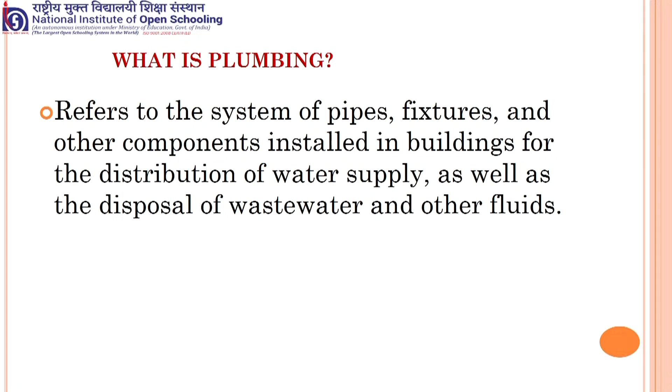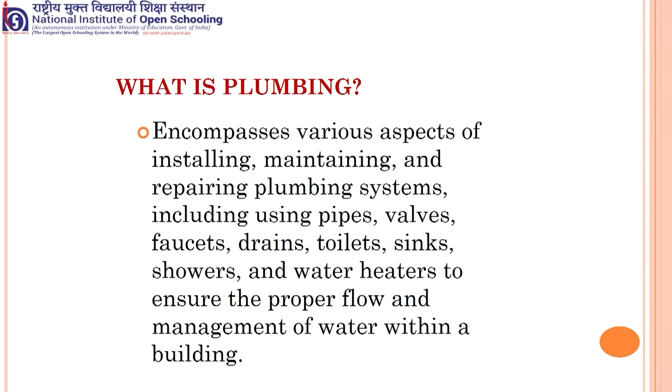Now, if I say one definition is regarding what constitutes plumbing, what are the different components of plumbing, but in another definition we have various activities. For example, installing fixtures, installing different gadgets just like a geyser or many other items, then maintaining and repairing plumbing systems, various fixtures, because every day you have wear and tear, so you need to repair that plumbing system, including pipes, valves, faucets, drains, toilets, sinks, shower, water heater or geyser, to ensure the proper flow and management of water within the building.

Now, as I told in the beginning, there is an overlapping. Sometimes we use fittings, sometimes we need fixtures. Since you are a student of NIOS and after passing there should not be any confusion in your mind, when anybody asks you to differentiate between fitting and fixture, as a proud student of NIOS, you should be able to differentiate between fitting and fixture.

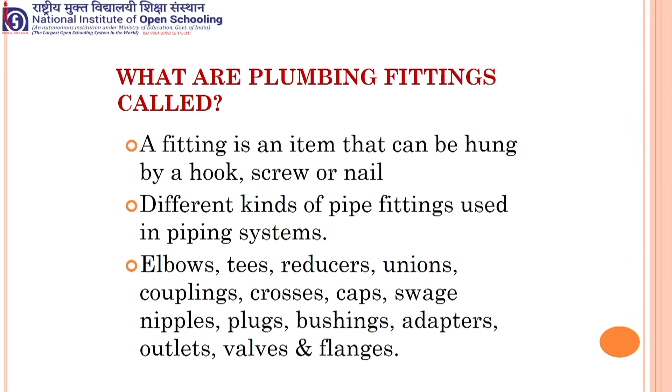Normally, a fitting is an item that can be hung by a hook, a screw or a nail. Different types of pipe fittings in a piping system are included as pipe fittings. Then different elbows, because you need elbows to bend or make an angle of water distribution. Then T's, reducer, union, couplings, crosses, caps, swage nipples, plugs, bushing, adapter, outlets, valves and flanges.

All these we have already covered in our earlier sessions, where elbows are for making an angle of 90 degrees, T's for distribution in different directions, reducer where the area gets reduced, union when you join two pipes of different cross-section area. Similarly coupling is also a type of joint, and crosses. So these are the different types of fittings.

Now comes the fixture. A fixture is a part that is connected to the plumbing system and carries water through a building. If you recall the definition of plumbing fitting, it also carries water, but basically it is used for changing the direction or joining the pipes - all that, even the piping system, comes under fitting.

While the items used for various purposes, just like for taking a bath we need a bathtub, for washing hands or washing tubs, washing utensils, you need sinks. Even showers, tubs, toilets, faucets for regulating the water flow - all these come under plumbing fixtures. The most important part which differentiates fixture and fitting: a fixture can be fixed into a wall or the floor, while a fitting is an item that can be hung by a hook, a screw or a nail. That is the basic difference between fitting and fixture.

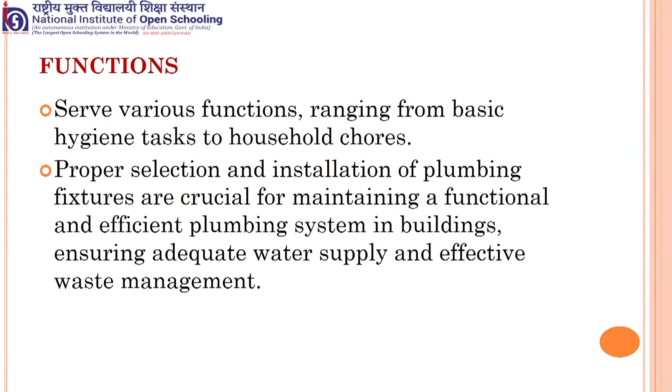If the plumber is skilled and competent, after fixing or installing the fixture, you will not face any problem. If the plumber is not competent or not skilled, then a lot of problems you will face. Even after installation, there may be chances of leakage of water, or the fixture may not work.

As in earlier slides, we include sinks, toilets, and they are properly designed because the purpose is transporting the water as well as serving the comfort of the customer or client, and it should also be hygienic. These are the several types of fixtures: urinals, faucets, showers, bathtub, toilet, and sinks.

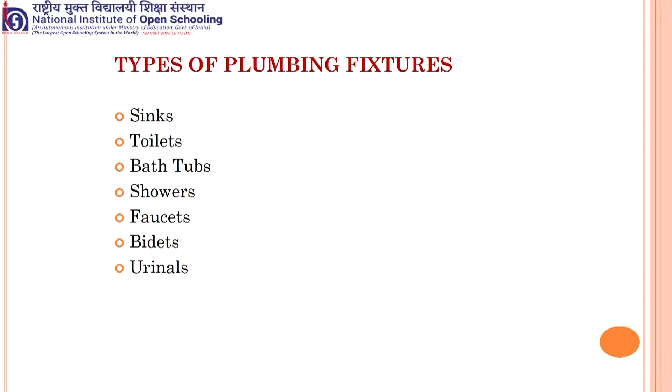Now as per your study material, the fixtures can be divided into two categories. One is called ablution fixture and another one is your soil fixture.

Ablution fixtures are required to collect the wastewater, just like your wash basin or sink, whether you want to wash your hands, utensils or vegetables. You need a certain portion where the water comes and you wash your hands, utensil or vegetable, and it goes for disposal. Similarly, in a bathtub, you collect the water, take the bath, and it goes to disposal.

Flushing cistern is for your toilets, and even the drinking fountain. These are the most common ablution fixtures.

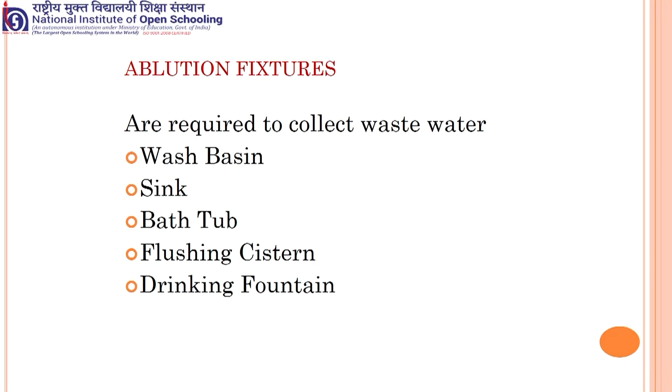Soil fixtures or soil fittings are required to take care of sewage discharge, like human waste or urine. They are from the WC and the urinals. WC means water closet. The slope sink is basically a type of pipe at a slope which connects the wash basin or sink to the main pipe.

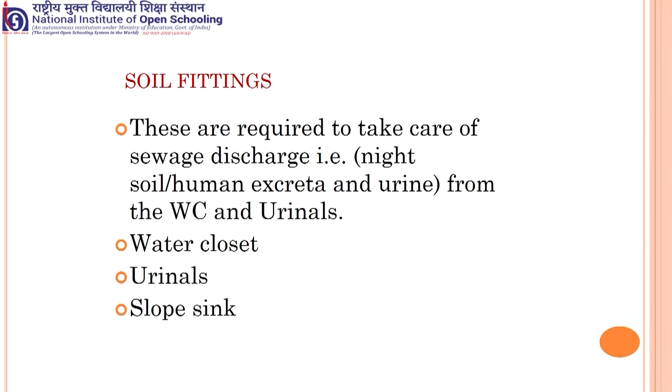Now there are certain sanitary fixtures we will take one by one, and the main purpose of today's lecture is to make you aware of the different objectives of studying fixtures. As I told you, there is sometimes an overlap where I use 'fitting' and sometimes 'fixture', but you should not be confused between the two terms.

First, the fixture or fitting should be made of durable, non-porous material with a smooth surface. There should not be a rough surface. Most importantly, the surface should be easily cleanable, so that whenever you need to clean it, you can do so comfortably.

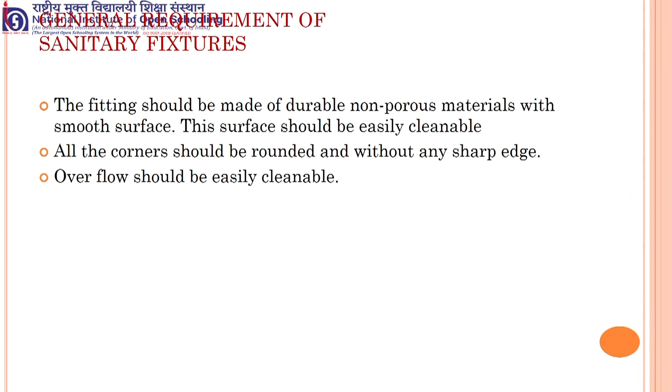All the corners should be rounded off. There should not be any sharp corner or sharp edge, because it is harmful to the plumber as well as to the domestic person. If there is a chance of overflow, it should be easily cleanable.

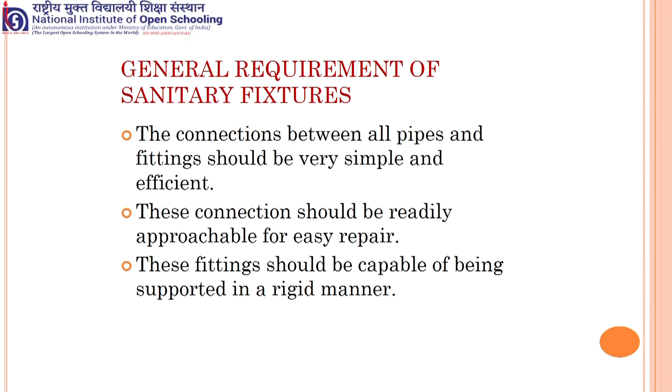Now, what are the general requirements? The connections between the pipes and the fixtures or fittings should be very simple and efficient. It should be leak proof - there should not be any leakage. It should be durable, and these connections should be easily or readily approachable.

Suppose you are connecting a wash basin to the pipe and due to wear and tear you need repair - the connection should be readily approachable, meaning it can be reached conveniently so your hand and tools can reach it.

These fittings should be capable of being supported in a rigid manner. That means whatever you are installing should not fall down - it should stay as it is with the fixtures.

Now there is an important term regarding how you will place a sanitary fixture. The most important thing is that wherever you are placing it in the apartment, it should be provided with natural light and air. The trap or grating, in Hindi called jali, can be easily checked and cleaned - the waste can be easily collected and the jali can be removed and cleaned from time to time.

The minimum distance of fittings from the wall should be 200 to 250 mm. This I have taken from your self-learning material on plumbing and piping.

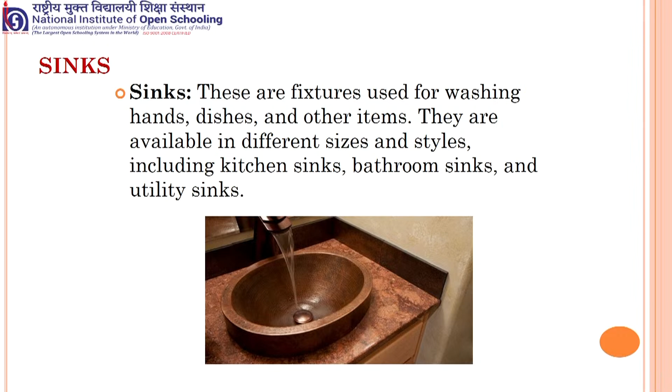Now I am giving you some pictures of the fixtures which you will come across. The first fixture is your sink. They are basically used for washing your hands, dishes and other items. Nowadays you will find they come in different sizes, styles and colors. Earlier you would find only white color, but now several beautiful colors are coming which match with the wall color or furniture color. They are used in the kitchen, bathroom and as utility sinks.

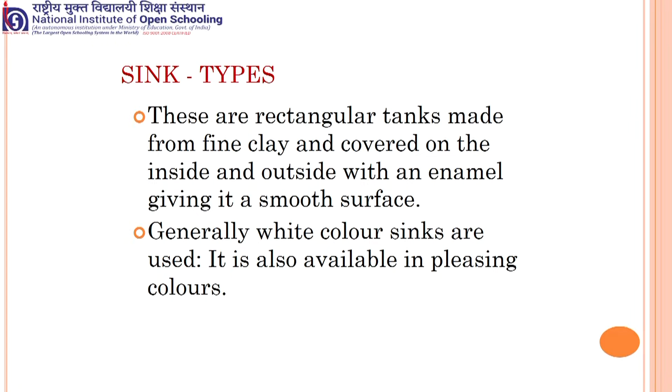Now what are the different types of sink? They are made of clay, covered inside with enamel to give a smooth surface. White color sinks are normally used, and now they are available in pleasing colors too. Another important thing, if you differentiate, you have a kitchen sink which is bigger in nature. Nowadays, with advancement in technology, we are making kitchen sinks with two partitions.

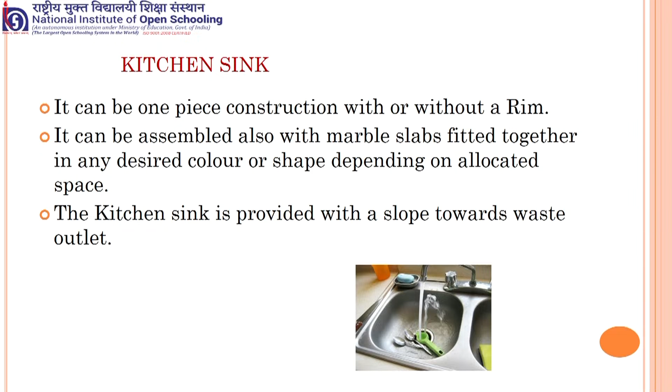So you can have a marble sink or a steel sink. They have a natural slope towards the waste outlet so that water should not accumulate at one place. Kitchen sinks are provided with a draining board which is fitted on the right side of the user. That means if I am standing, the wastewater disposal outlet will be on my right side, so that whatever I am using with both hands should be disposed of from my right hand. Now there are some specifications: the height of the top of the sink should be 900 millimeter from the floor.

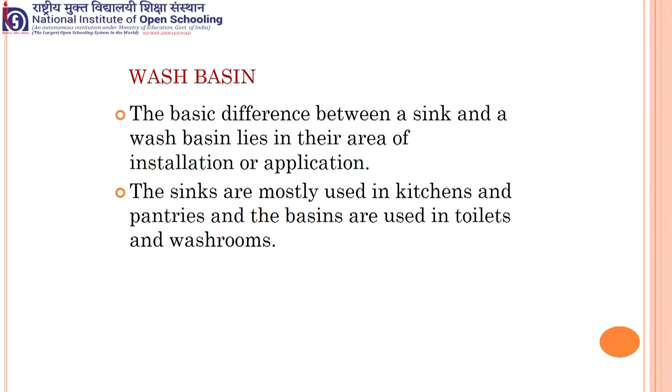Now another type of sink is also called a wash basin. The basic difference between the sink and the wash basin lies in the area of installation or application. Sinks are basically and mostly used in kitchens and pantries, while wash basins are used in toilets and washrooms.

If you recall your self-learning material provided by National Open School, the first type of wash basin is the Emerald type, with 3 semi-punched tap holes on the back so that it can be fixed on the wall. Basic or standard size is 550 to 400 millimeter. These tap holes are provided for installation. It is also available in white color and several others. The standard weight is 12.5 kg, but now with advancement we are having very lightweight wash basins.

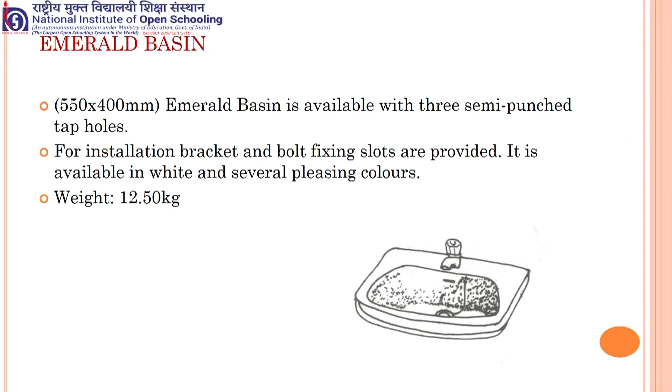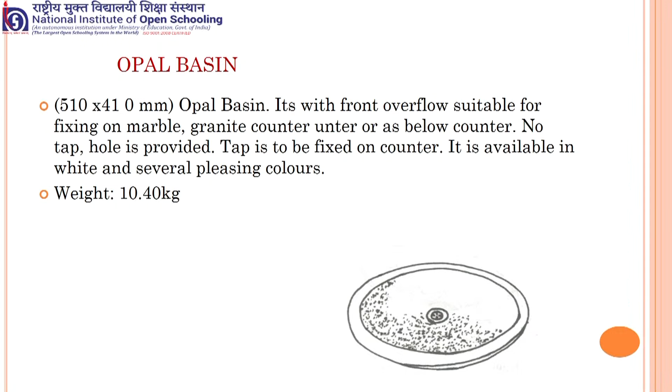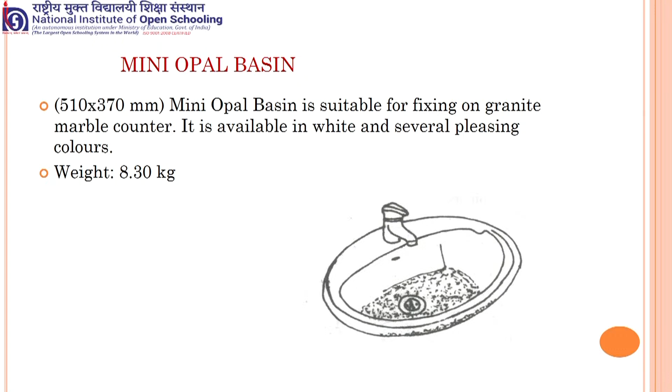Opal wash basin: here again there is a standard size, that is 510 to 410 millimeter. It does not have any tap, nor a hole is provided, and normally the tap is fixed on the counter. The normal or standard weight is 10.4 kg. Mini Opal: in this, your tap is provided, and weight is very less, 8.3 kg. It is used for various purposes and can be fixed on granite or marble. Since it is light, the granite can bear its weight.

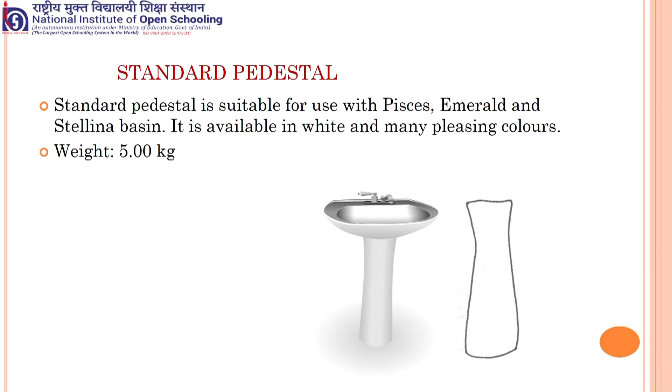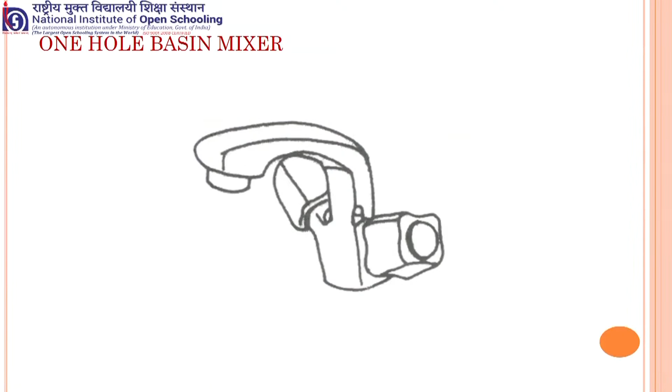Another important fixture is the one hole basin mixer. This is a type of tap. On the left hand side and the right side you have a regulator. On the left you have hot water, and on the right you have cold water, and you can mix it to get either hot, cold, or a mix of the water.

CP waste. This fixture is normally found in the wash basin or the sink. Basically they have a structure, and in the coming sessions we will explain the details of its structure and how it works. In the present lecture, CP means chromium plated waste. So water comes, and you have grates or holes, normally 7 or 8 holes, from where the water is disposed of to the ground.

Now basically you have a service sink or slope sink, which are also used by the maintenance worker for various purposes, just like for plumbing purposes and for washing some type of item.

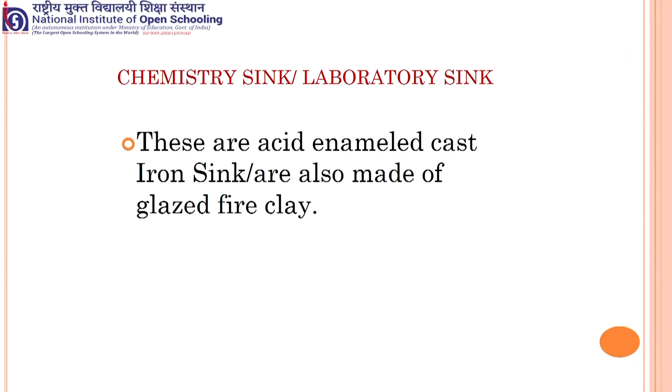Similarly, if you are a student of science, you must have encountered the chemistry sink or laboratory sink. They are basically used in the labs, and they are enameled so that acid should not affect their material. So they are called a chemistry sink or laboratory sink.

Double steel sink. In the first figure, if you recall, we have a partition, so it is called the double steel sink. On one side you can chop the vegetables, and on the other side you can have the utensils or something. So it serves a dual purpose.

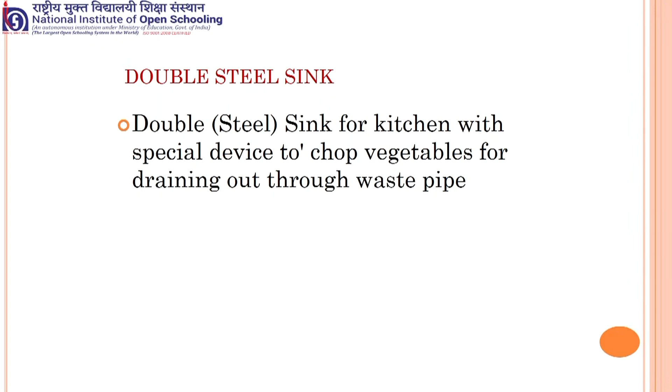Combined sink. In the kitchen, sinks are sometimes called a combined sink. They are used for washing crockery as well as laundry. Sometimes we also use a draining board, because now automatic washing machines are there, so this type of sink helps you wash the clothes after.

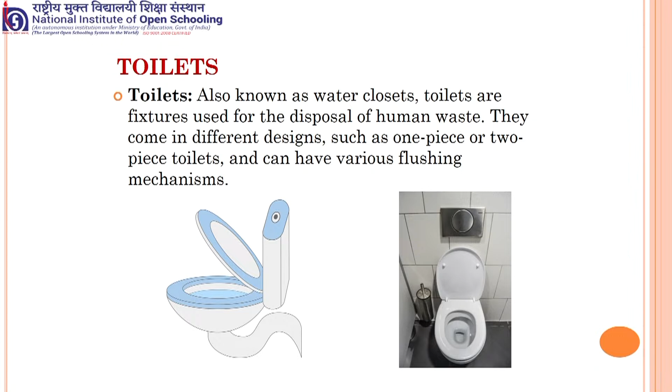Now we will come to another fixture. It is a toilet, which is very familiar to all of us. This is also called a water closet. Toilets are fixtures used for the disposal of human waste. They come in different sizes. Earlier they were of 1 piece or 2 piece, and they have various types of flushing mechanisms. Flushing means for disposing of the human waste.

Second, another type of fixture is known as the bathtub. If you have a big size of bathroom, you can install the bathtub for taking a bath. There are various types of bathtubs, just like standard bathtub, corner bathtub, and even whirlpool tubs, where you have a whirl of water, whereas in a normal bathtub the water is silent or plain.

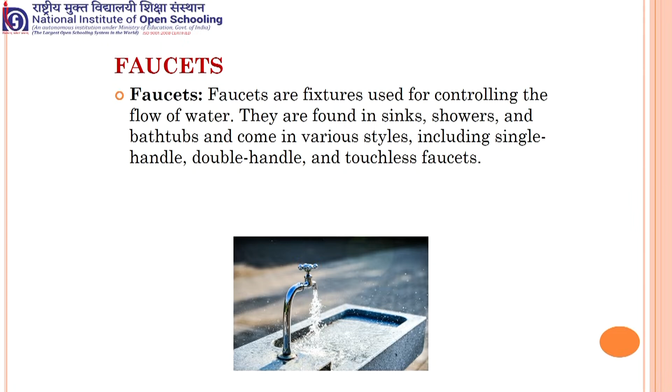Faucet is basically a type of fixture for controlling the flow of water. Water comes from the pipe, and sometimes you need less water, sometimes more, so that purpose is solved by the faucet. It can be single-handle, double-handle, or even touchless. You must have experienced touchless faucets at airports or various hotels, where you just stand in front and put your hand near the sensor, and you get the water.

Bidets are fixtures used for personal hygiene, basically for cleaning genital and anal areas after using the toilet. They are commonly found in toilets. There are various types of bidets used for different purposes - a normal tap with a mug is also a type of bidet, while with advancement we now have various other types of bidets, which we will discuss one by one in coming sessions.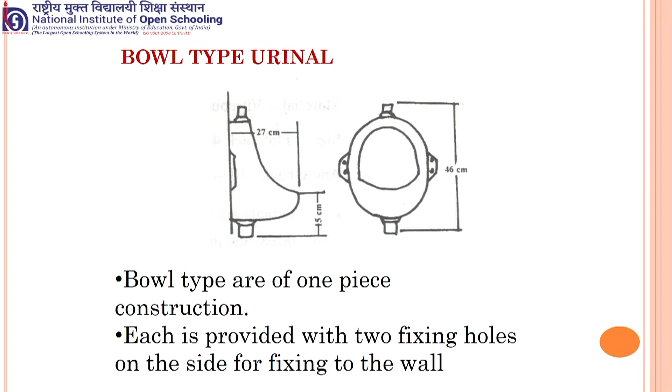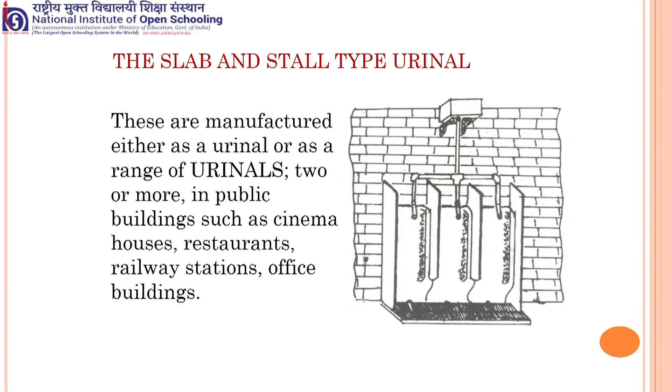This is a very common slab and stall type of urinal, normally used in public places or buildings like cinema houses, restaurants, railway stations, or office buildings. They have a slab where the person stands and urinates, and water comes from the tap distributed at 3 places. The main problem with this type is that water stops coming, and because of the foul smell, it becomes very difficult to use.

Squatting plate urinal - this is basically used by ladies or females. It is again a one-piece construction. Earlier it was mosaic and cemented type, but now it comes with different pleasing colors also. It also has a wastewater disposal outlet, and fresh water comes in to avoid any foul smell.

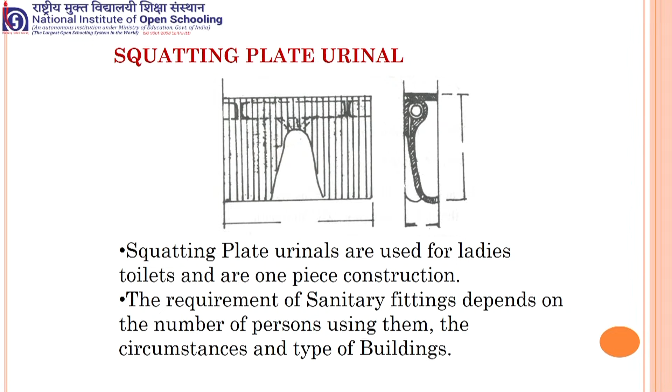Now, what are the basic requirements for urinals? Urinals should be flushed by an automatic flushing cistern fixed above the urinals, and there should be a discharging system for the urine through a flush pipe. Similarly, the automatic flushing cistern must have a capacity of 4.5 liters, and the cistern can be adjusted to flush after every 20 minutes.

This is very important - now these are some basic guidelines for the urinal. One urinal should have the following fittings and materials. If we are talking about one urinal, there should be one horn coupling.

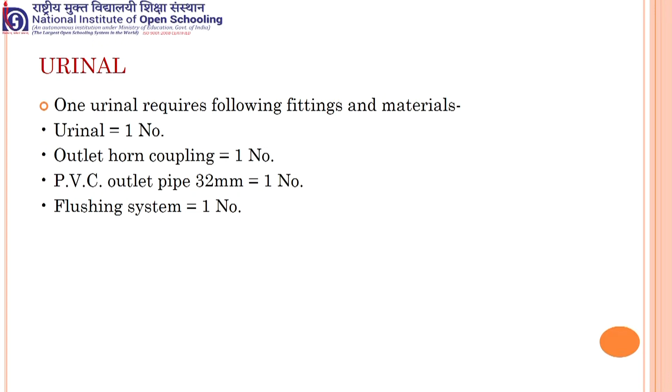The PVC outlet should be of 32 mm diameter, and there should be one flushing system.

Now, this fixture is called laundry trays, also known as laundry sinks. They are installed along with washing machines or for other purposes, with taps for hot and cold water, and at the bottom a system for drainage of wastewater. This is basically used for washing clothes. After the automatic washing machine, we put the clothes here in the laundry tray, open the tap, rinse the cloth, and then go for drying.

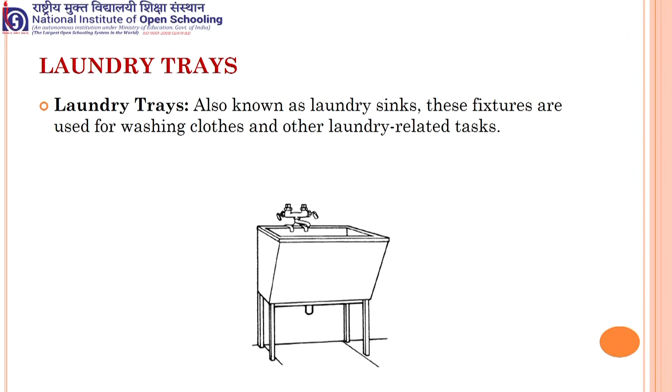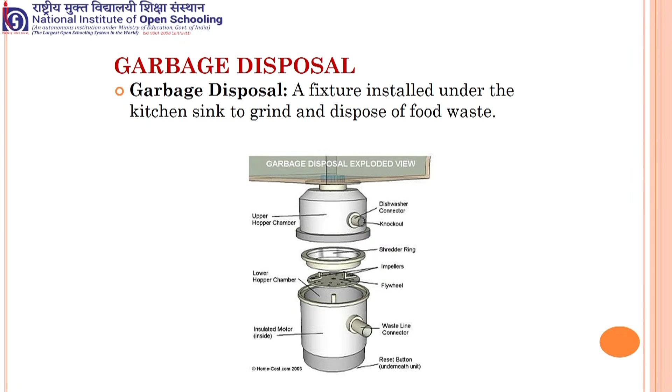Now, this is a garbage disposal. Every kitchen sink has this type of system. When you see it, it looks like water is just going through the drainage pipe or wastewater disposal pipe, but it is not so. It has certain components which take care of solid waste material from going through the disposal pipe, because if it does not restrict it, your disposal pipe will get clogged and you will not be able to dispose of the water regularly. You can see how complex the composition is, only for the comfort of the user.

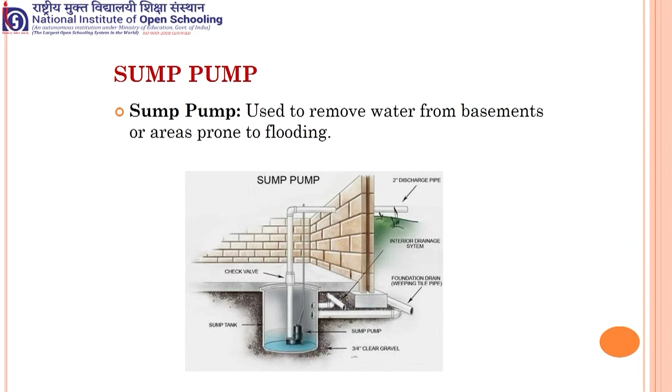This is called a sump pump. It is used to remove water from the basement or areas prone to flooding. They are installed below the ground, and whenever there is water in the basement, either due to rainwater, leakage, or a fault in the pipe, this sump pump will help in taking the water out from the basement so that after some time the area is usable, since basements are often used for keeping vehicles or other purposes. If water is collected or flooding occurs, there are chances of electric current shocks, so it is always advisable to use a sump pump to remove water from the basement or flood-prone areas.

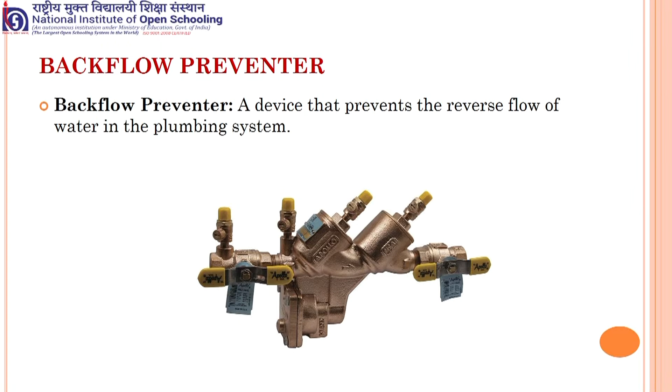Now, in this session, what have we covered? We have covered different types of fixtures. We have also explained how you will differentiate between fixture and fitting, because in normal language sometimes we use fitting and sometimes fixture for the same purpose. We have also discussed various types of fixtures which as a plumber you must know. I trust this session has been useful to you. In the next session, we will take each fixture, its parts, and how you will repair it. So thank you very much.